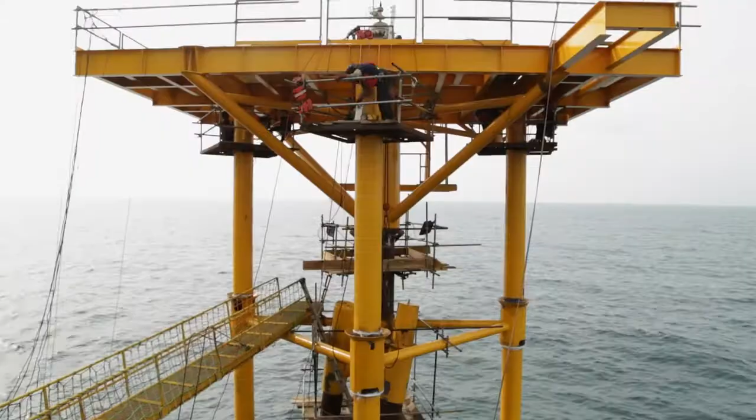Started in 2001, Compact Manifold and Energy Services Limited, CMES, an indigenously owned Nigerian oil and gas service provider, today continues to fulfill its vision at inception, which is to address the many operational challenges facing operators in diverse engineering sectors of the economy, most especially the oil and gas industry.

We started by creating an engineering design company. Then later we migrated to fabrication. After about 4 or 5 years, it also became pertinent that the federal government wanted to institutionalize the local content policy by having Nigerian companies step up to the plate by engaging themselves in more value-added

activity rather than just providing services. With its highly skilled workforce and a mission statement to be the benchmark for engineering design, construction, and consultancy in the country, CMES is today Nigeria's leading customer-oriented oil and gas service provider with a global outlook.

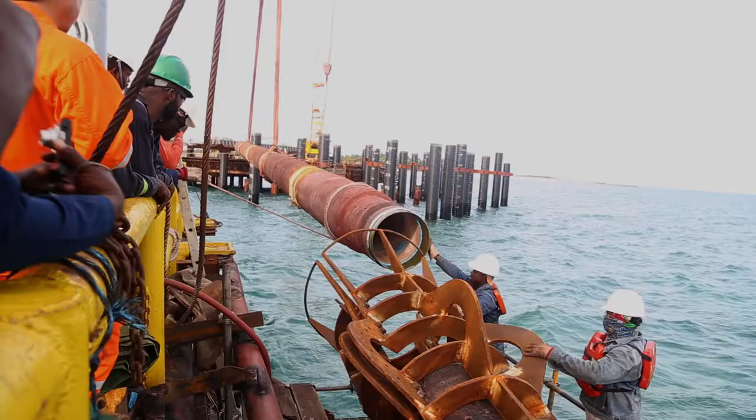As an engineering firm, we maintain engineers in all disciplines: process, civil, structural, both for onshore and offshore, electrical, instrumentation, and mechanical, as well as all of the design disciplines. We also have a very strong project management culture that delivers projects on time, within budget, looking at the client's needs and our commitments to our clients.

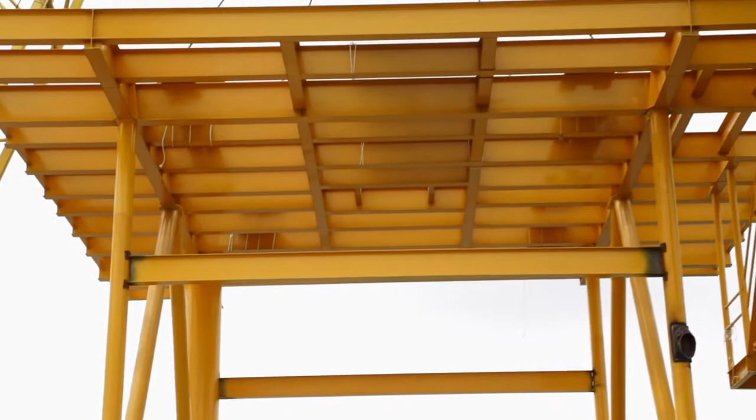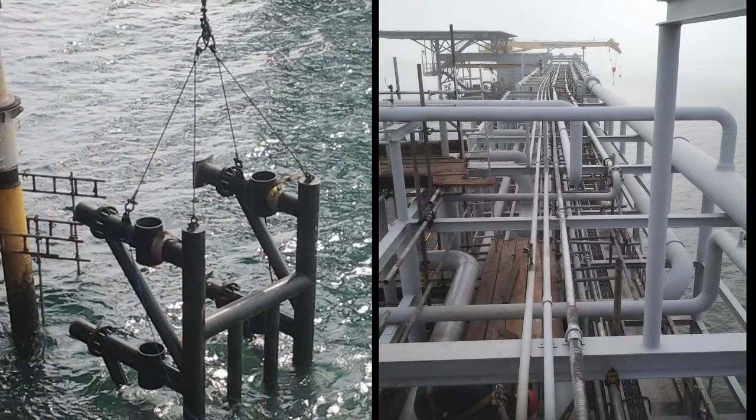Its scope of operation has grown from original mandates in project management, onshore and offshore construction, engineering design and procurement, to include consultancy services and the deployment of its wealth of knowledge in metal fabrication for construction in both oil and gas and building spheres of its operations.

From that little and humble beginning of less than 20 staff, we are well over 180 now, mostly engineers and majorly Nigerians.

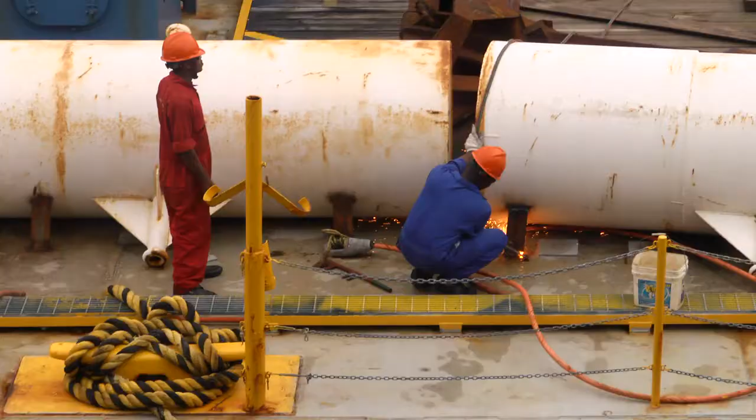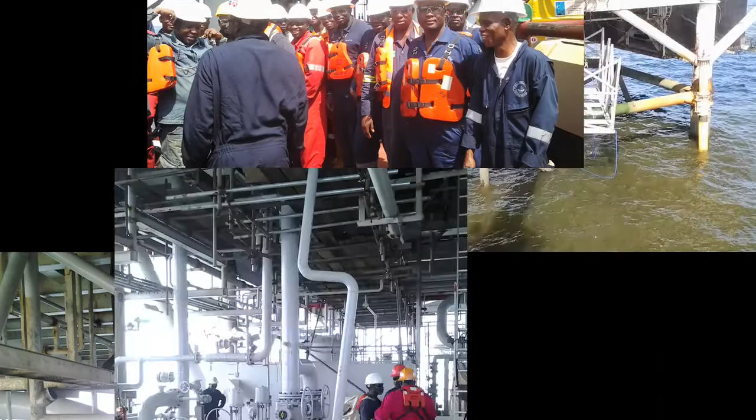Compact Manifold, as an EPCI company - engineering, procurement, construction and installation - has executed major projects with most of the IOCs in country and other marginal field operators.

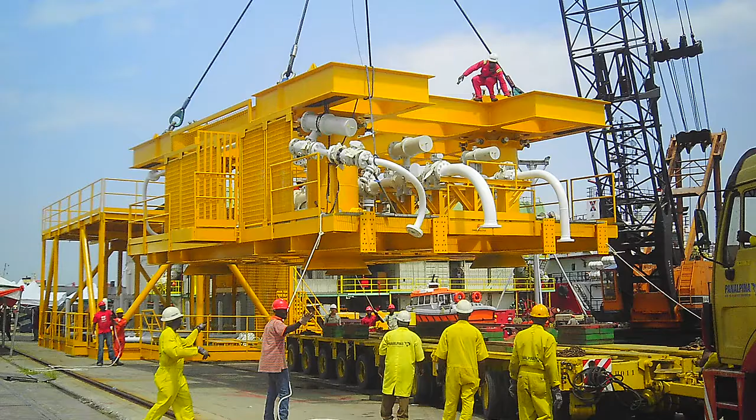Afren was one of the first platforms ever built by a Nigerian company in Nigeria, and this was done in 2007 by CMES. Afren is a 10,000 barrels production platform built and installed by CMES. We carried out fabrication, drawings, procurement, offshore installation and commissioning.

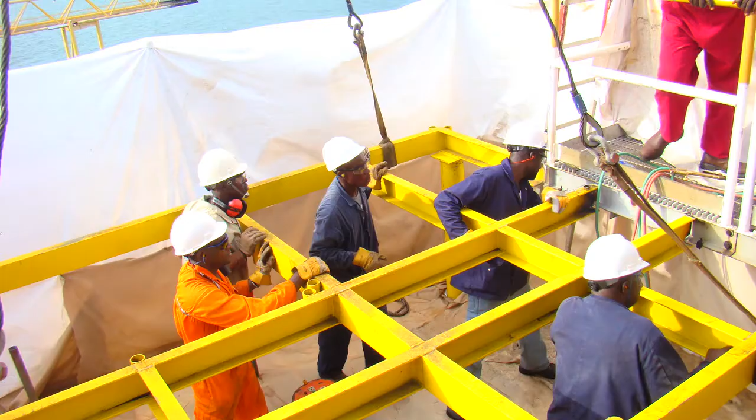The TB1921 project for Adax Petroleum is a subsea pipeline and topside installation project where we worked on over 21 platforms, such as KTMP, TMMP, TPU, ADSI, to mention but a few.

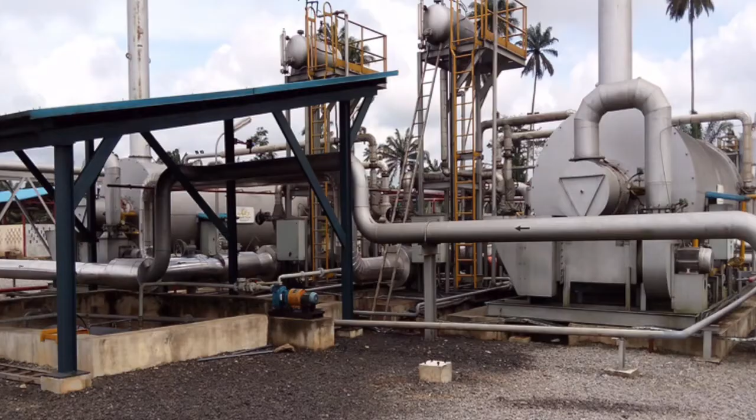The Calabar Law 3 project is a gas transmission pipeline and metering station owned by the Niger Delta Power Holding and NIPP. CMES was issued this contract as a complete EPCI, where all the engineering and procurement work, even to commissioning, was done entirely by Nigerians.

At completion, CMES also operated and maintained that facility for 2.5 years with no issues.

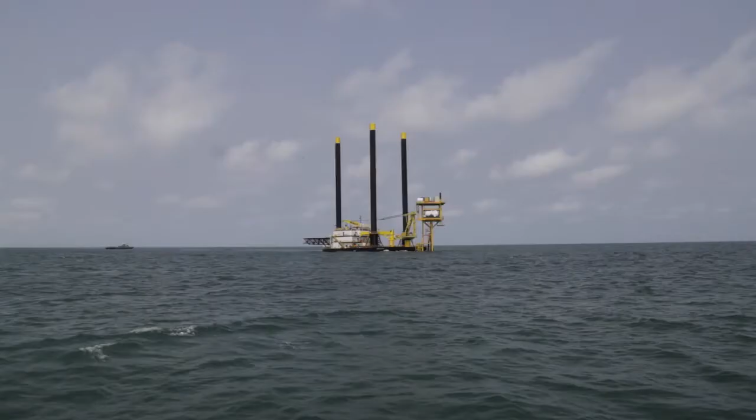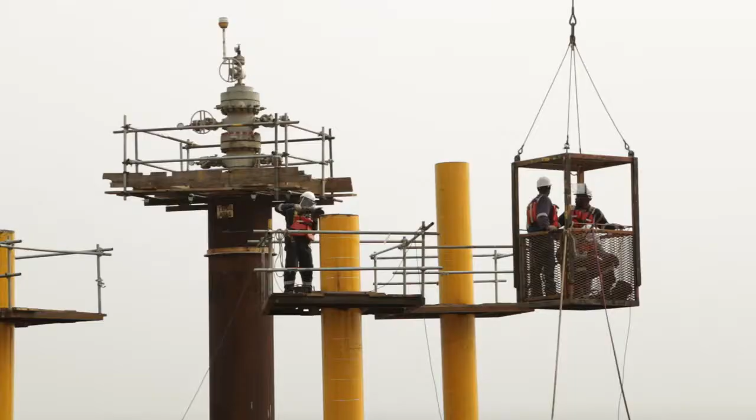We also have ongoing projects right now. One is the Tenoil project, the Atta Field Development project. It's also a complete EPCI project, involving detail engineering, fabrication, installation, and commissioning. It also includes the pipe lay of a 6-inch by 2.1 kilometer pipeline from Atta 6 to Inanga platform.

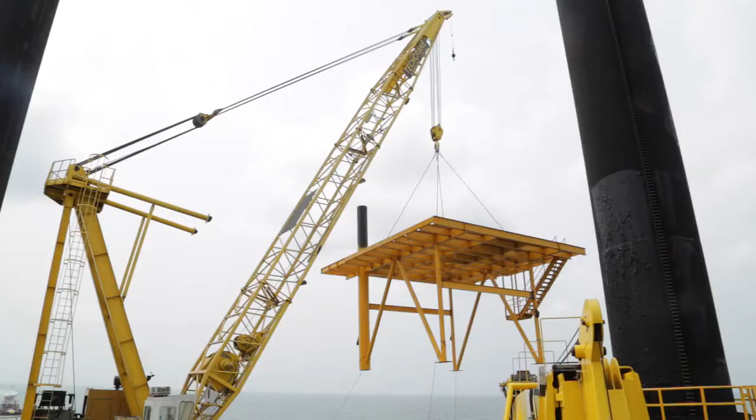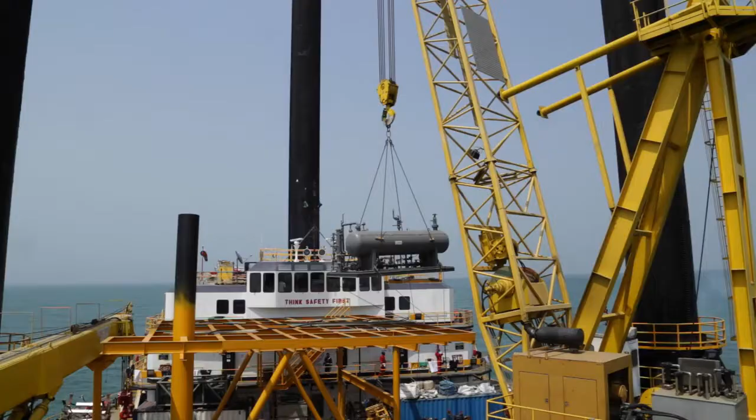This project was also extended because of the amount of work we've done, because the existing Atta 6 platform has been standing for the last 5 years, completely installed with all the process equipment and generators on the platform.

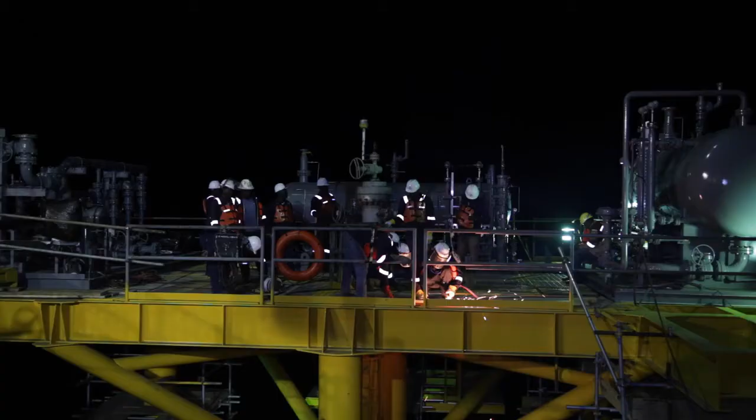The client had to call us back for a possible extension of the contract, which is to carry out the 12-inch by 9 kilometer pipeline from Idaho to Inanga, and also the fabrication and installation of 2 new deck extensions at Idaho and Inanga, where 12-inch receivers and launchers will be installed respectively.

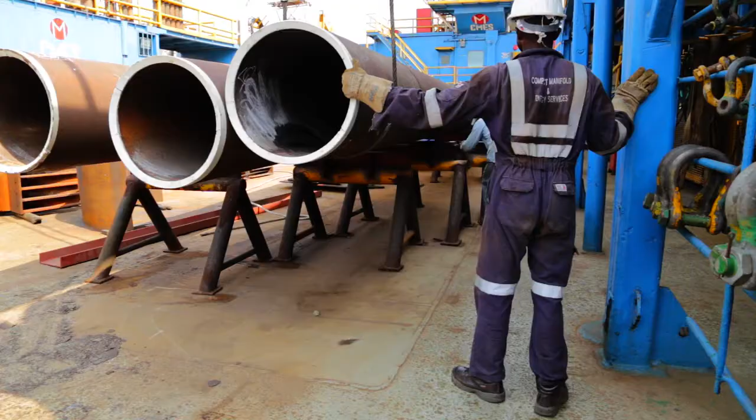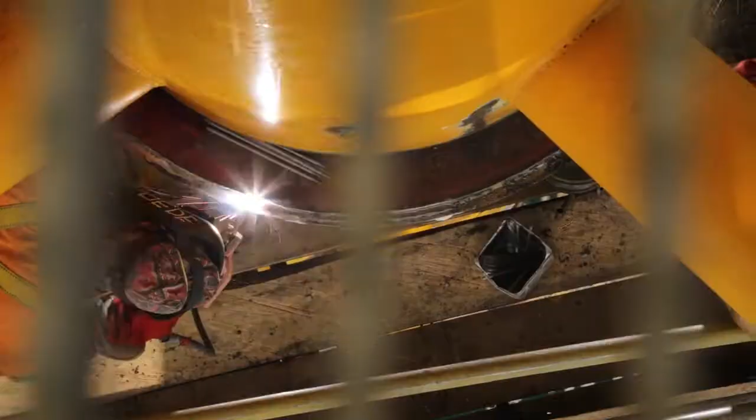At Compact Manifold and Energy Services, we see safety first. We sleep safety, we dream safety in every project that we are involved in.

When we were carrying out the Chevron project, CMES was given an award for carrying out over 5,000 man-hours without lost time injury. This was a great achievement, and we're very proud to own it. This has motivated Compact Manifold and Energy Services to be safety conscious and safety inclined.

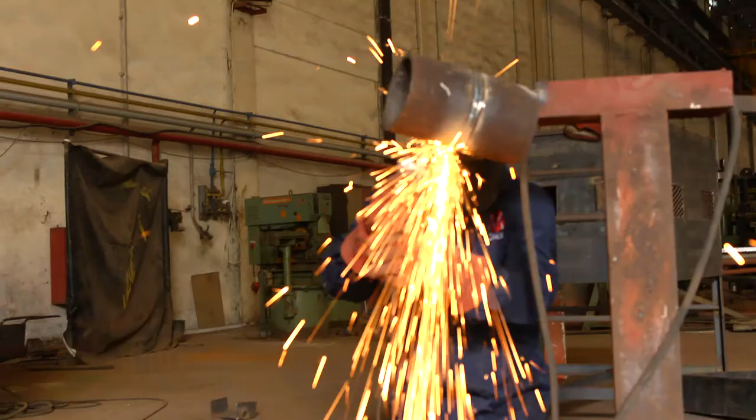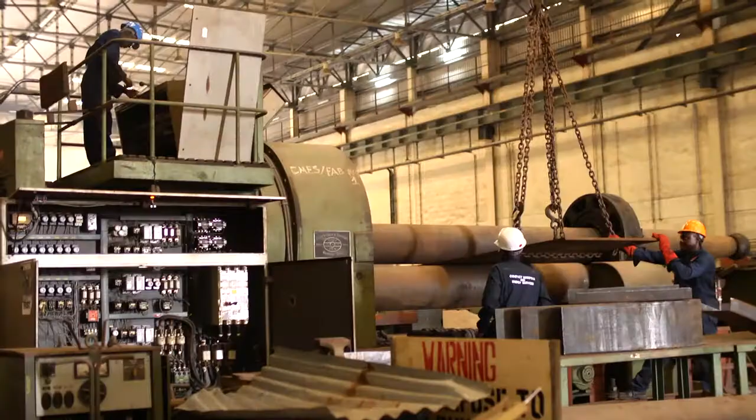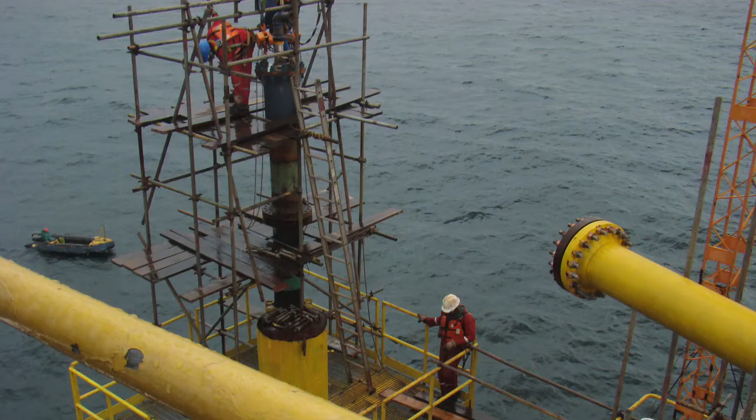Compact Manifold, supported by insights from technical partners KBR Incorporated, continues to produce precision tools from its fabrication yard in Lagos, Nigeria. Its construction services include all fabrication works, pipe laying, installation of automated and manual pumps on facilities, as well as relevant tests for a high-quality final product, stress analysis for upgrading of existing platforms and facility design, with ease in operation and safety.

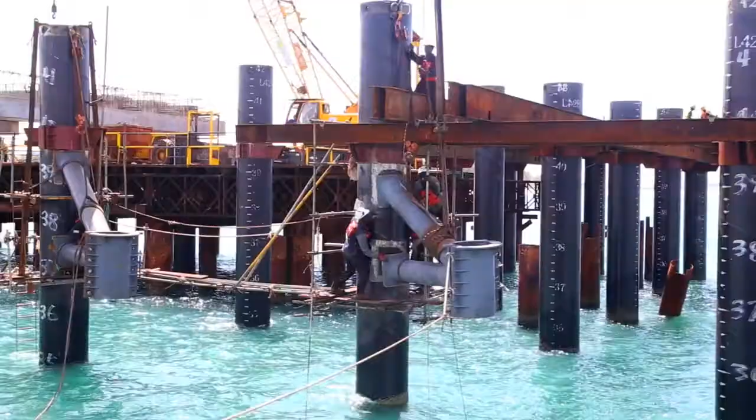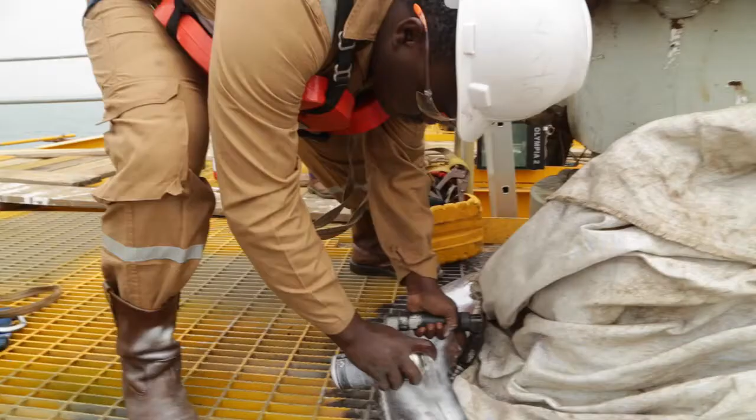Engineering designs are done and construction effected after approval of design. Maintenance and repair works are carried out after proper analysis and evaluation of existing structures.

CMES boasts of a strong track record in redesigning and deck extension works in the upstream and downstream.

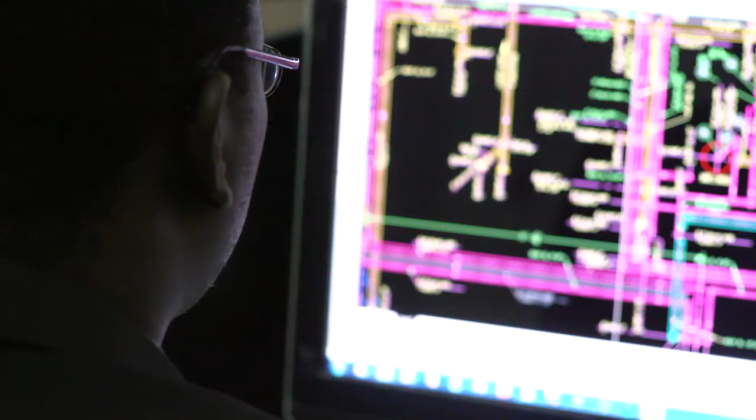With a strong bias for human capital development, employees are continuously trained and retrained in cutting-edge software positions, making the company a one-stop shop for engineering design.

CMES provides preliminary and detailed engineering design services utilizing the latest design software and structural stress analysis.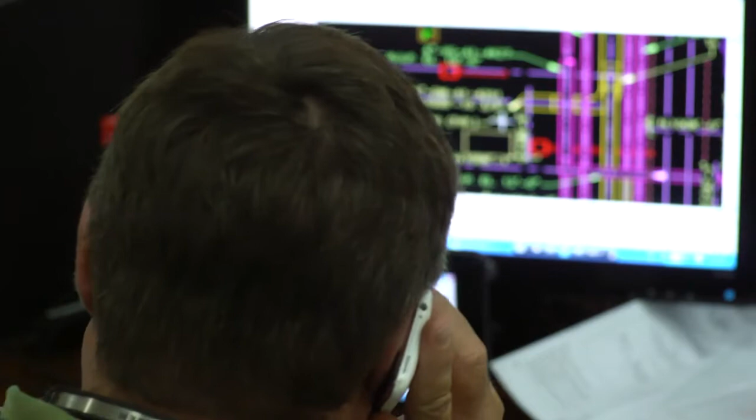The design system takes full advantage of industry-standard design codes, along with design packages like SolidWorks, AutoCAD, PDMS, and SACS, for its engineering and analytical design deliverables.

The project management team is made up of experienced and dedicated workforce responsible for the quality management system of any project.

A lot of times, a lot of companies can deliver a technical solution, that's right, that's 99%. The biggest thing that we deliver on, that we try to concentrate on, is our project management.

If you don't deliver engineering on time, it has a knock-on effect on the startup of the project or the client's ability to deliver to stakeholders on time.

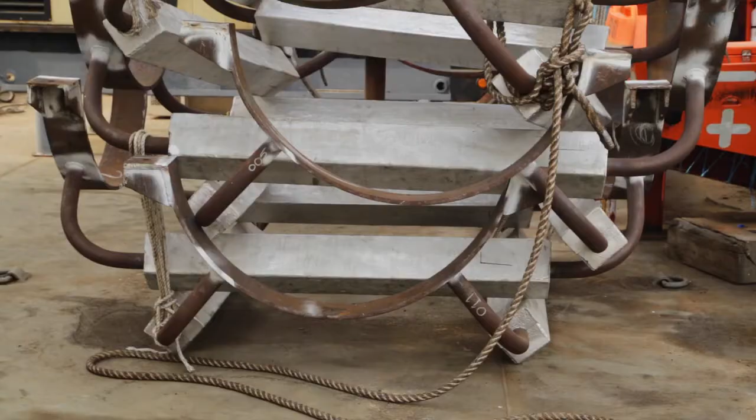So we have a much broader view, or take a much bigger picture view of the client's needs, as opposed to just the small section of engineering that they may have.

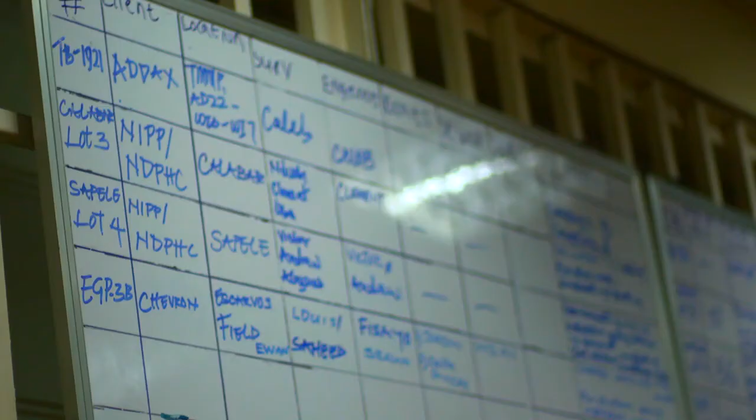The team follows a well laid out process for project control and transmittal system that enables detailed documentation to be sent for review to the client and final approval before issue for construction.

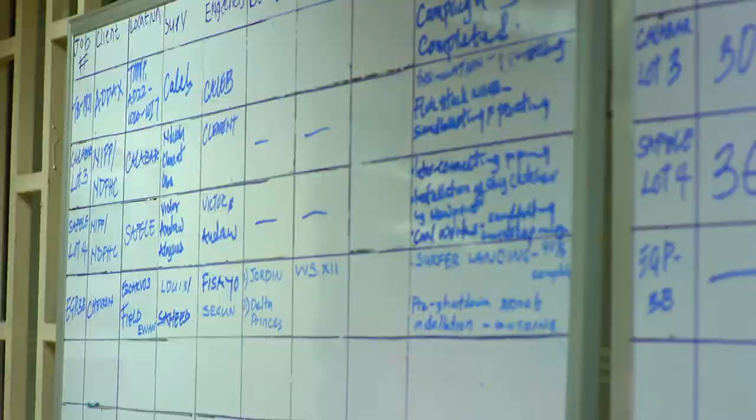This ensures all design and analytical standards are met, with safety, health, and environmental procedures unabridged. The team develops a detailed project schedule and utilizes the project progress reporting system to monitor project delivery dates.

The finance and accounts department is a very integral part of any company, the nerve center of any company, because every activity goes through the department.

We have an enterprise-wide system using the SAP accounting module and other administrative modules.

We have an internal auditing department. We also have a very vibrant procurement department working very closely with the accounting department. So it's a very key aspect of CMES.

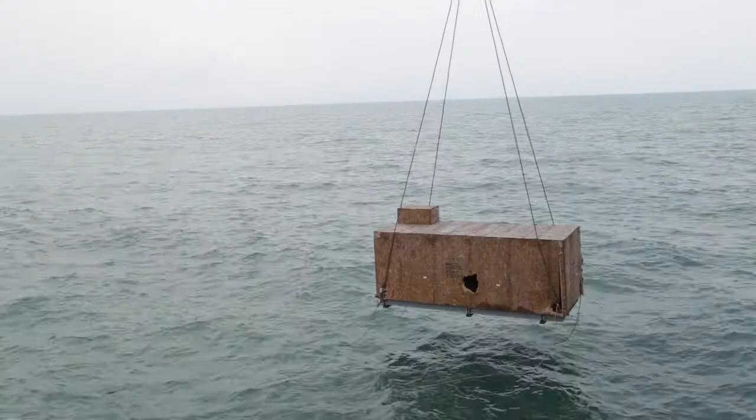The procurement department creates a synergy between all the departments in CMES, from the engineering department or whichever department generates the requisition, to relating with the vendors, ensuring that the service or quality of products they are going to deliver is what is requested.

It also connects to accounts for payments, and even QAQC for the inspection, expediting, and making sure that delivery is on time as and when due, as planned.

Ultimately, to create and ensure satisfaction for our clients.

CMES's competencies in engineering designs include conceptual design, civil structural works, design of pressure vessels, piping plan and code calculations.

These include flow station design, manifolds, valves, flow meters and metering pumps, general arrangement drawings, plot plan drawing, electrical and instrumentation designs, process and piping design, valve sizing, deck extension design, and structural stress analysis.

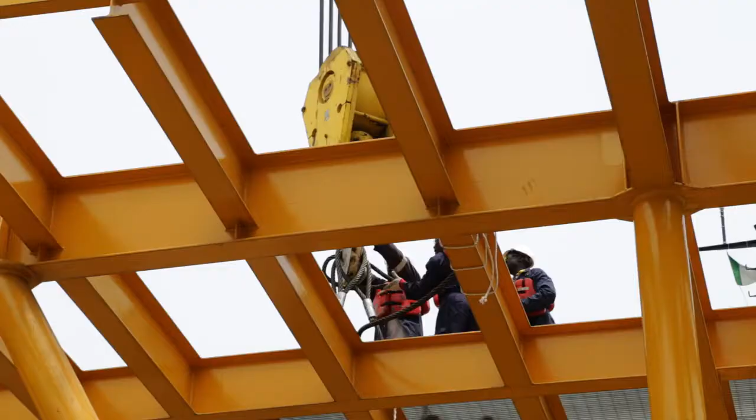Their footprint of excellence can be seen all over the country, evident in the successful execution of projects.

Such projects include the 42-ton Oyot drilling template, the 38-ton Etim NW well drilling template, and the Okoro Setu field.

This was the very first platform for the company, all presently deployed and providing services at oil and gas installations all over the country.

This was fabricated out at the former Naval Dockyard Fabrication Center, and we were able to deliver this project on time and on cost.

And that happens to be the first platform by an indigenous company, to the best of my knowledge.

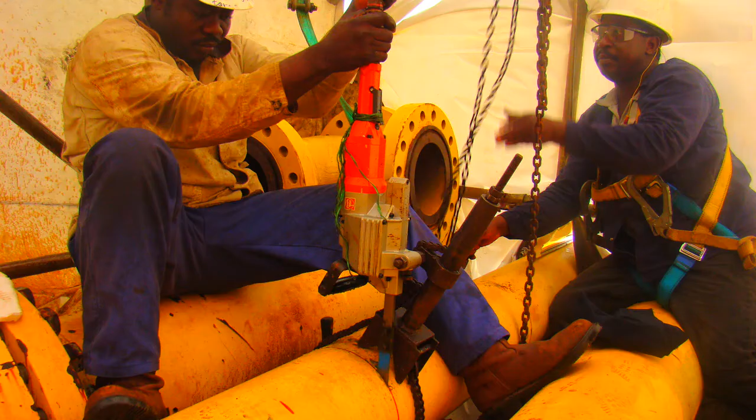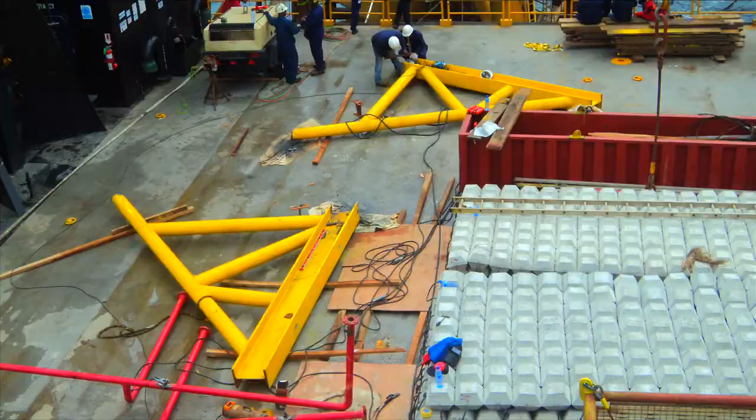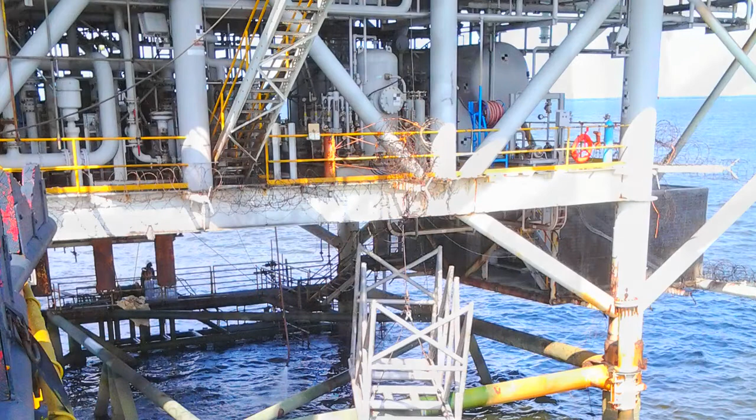We have a project management team. We have a construction manager, and a construction superintendent who manages offshore installation.

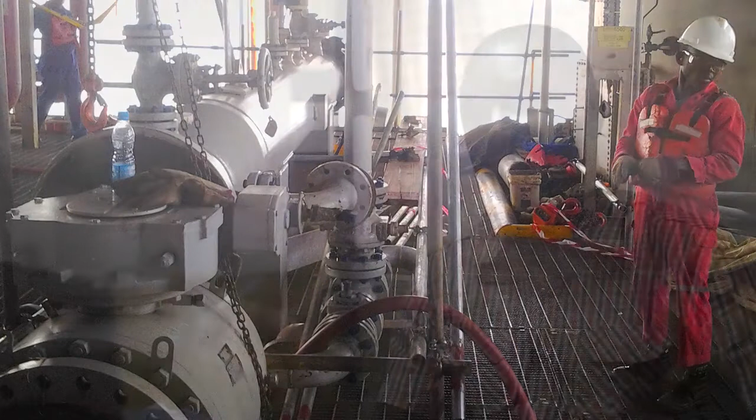The installation plans were done in this office with the pool of engineers, and these installation plans were reviewed with the client.

Based on their acceptance, we mobilized to the field offshore.

We have a logistics, a marine logistics department, who manages our vessel movements, and together they delivered one production platform to everybody's satisfaction.

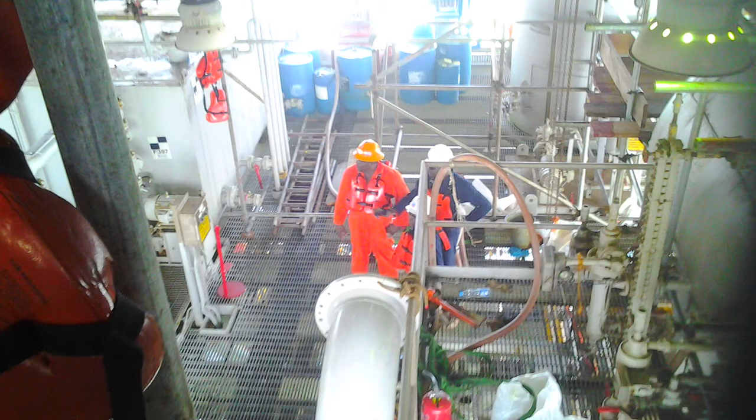In 6 months' work, we didn't have any HSE incident.

No LTIs, no fatality, no MTCs. And the project quality is top-notch. That's what we strive to be at CMES, a top-notch company.

We send a lot of workers to HSE training, BOSIET training, OE training, and IF training.

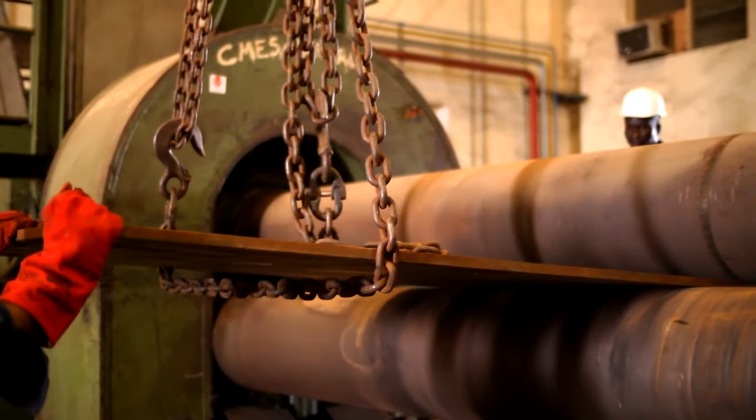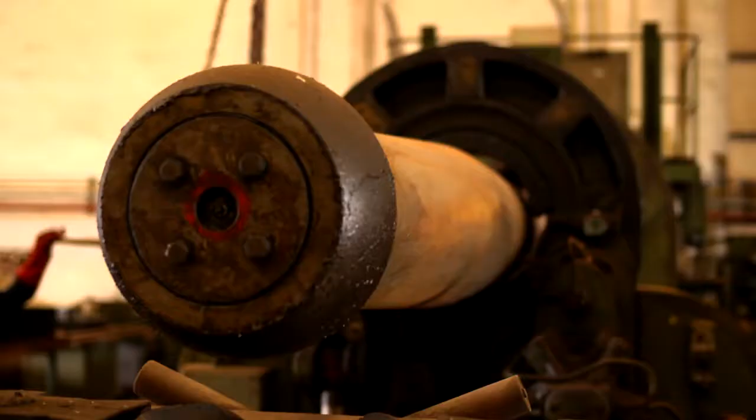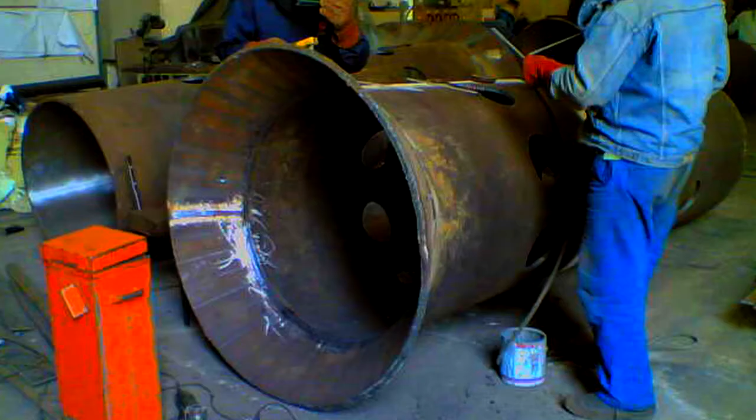CMES Fabrication has a well-equipped fabrication facility located at the Naval Dockyard. They provide expert services in the fabrication of onshore and offshore structures. In order to maintain internationally accepted standards, its fabrication services satisfy ISO and BS standards. Currently, they are engaged in third-party inspections through SGS and Lloyd's of London.

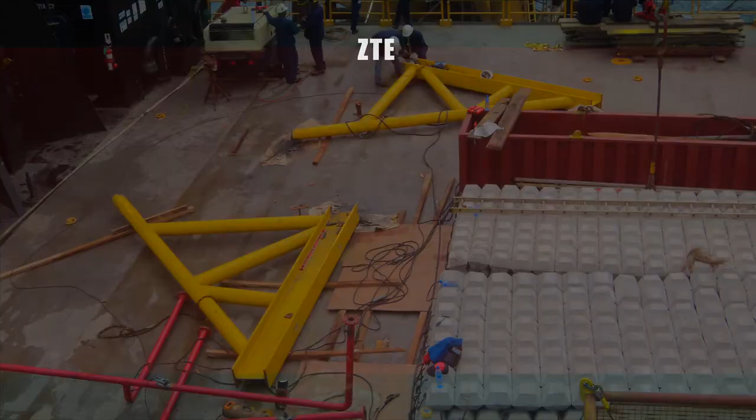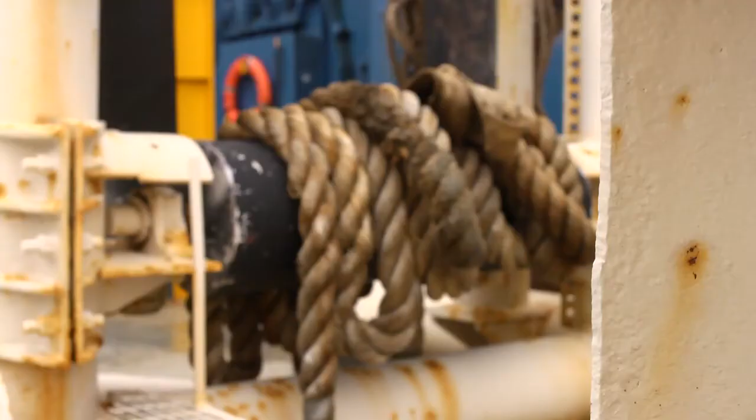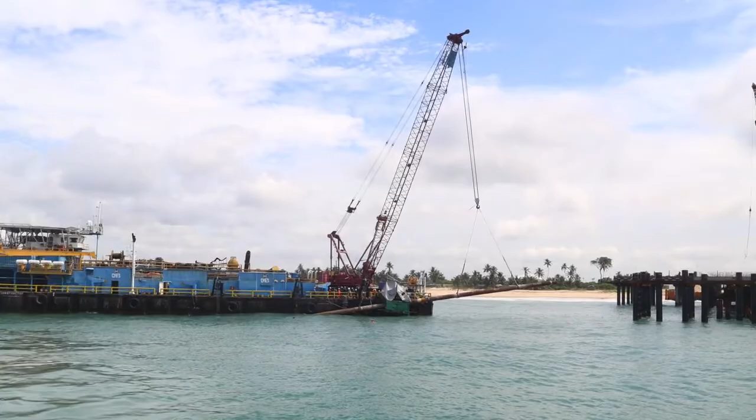To support its offshore construction activities, CMES acquired two barges, the Sea Constructor and the GP35. The Sea Constructor is a 260-foot barge with an 8-point mooring system. It's a barge designed to do pipe laying as well as support offshore construction activities.

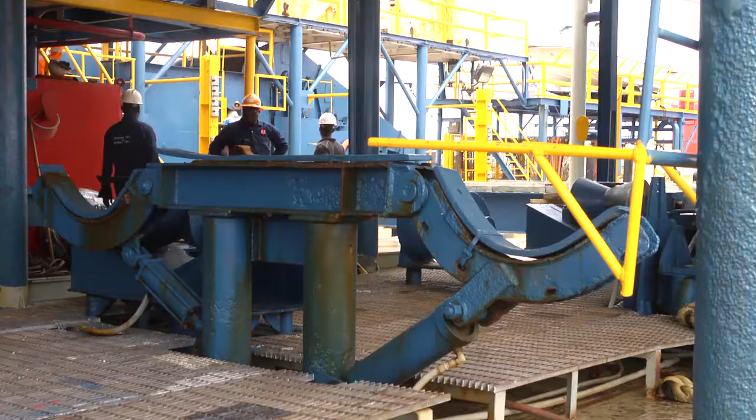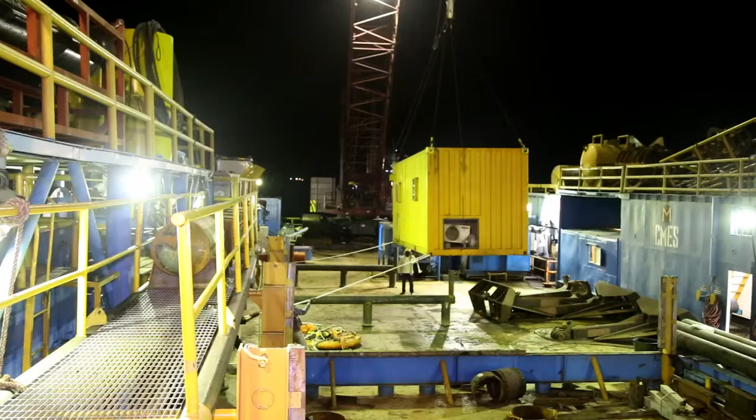It has a tensioner which can take up to 55 kips and can lay pipe from between 2 to 24 inches, and can go up to 36 if modified. It has a crane on board which at 150 feet can pick up 150 tons, and 170 tons at 110 feet. The vessel is able to accommodate 104 personnel and also has pipe laying facilities.

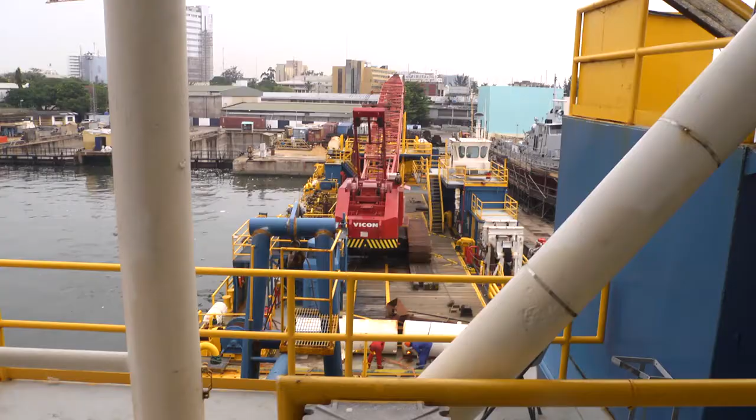GP35, which is right behind me, is a 165-foot barge with a 4-point mooring system. It's able to keep 48 personnel on board and has a crane that can lift up to 70 tons. It also has pipe laying capacities of up to 8 inches and has spud cans that can go up to 50 feet deep that can hold the vessel without the anchors.

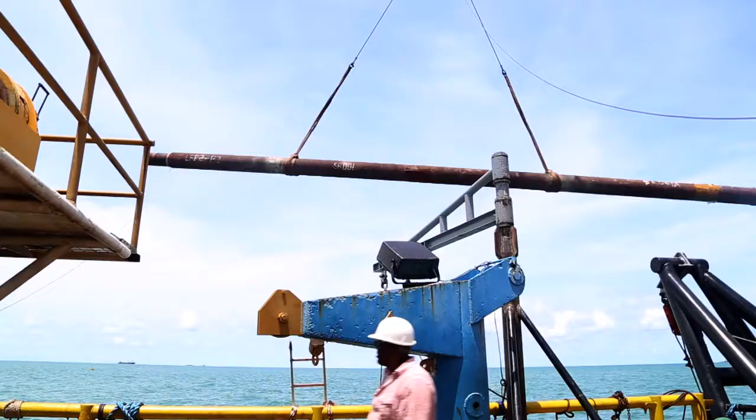Both vessels are very flexible in what you want to use them for. They can both be used for pipe laying, offshore construction, and also as support for accommodation facilities.

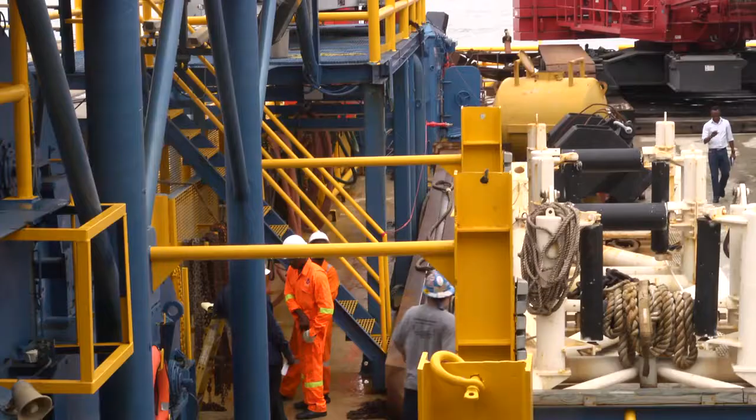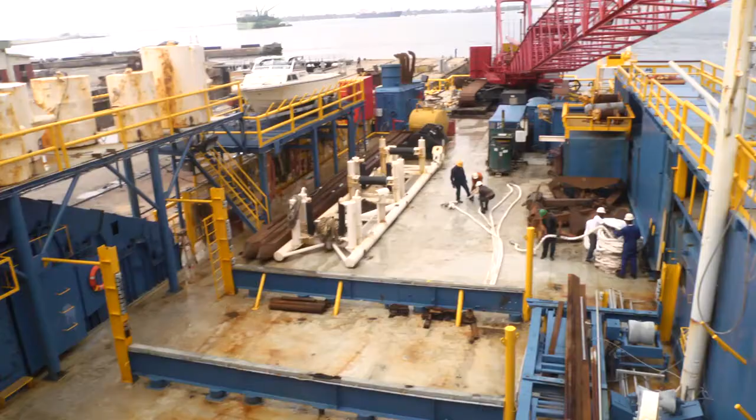My name is Charlie Dowden. I'm superintendent on board the Sea Constructor here. I've been doing this type of work for something like 42 years, maybe 20 of it in Nigeria. I've also worked derrick barges, combination barges, where you can either put in pipelines or install platforms. This barge is designed specifically for pipe lay, or it can be used as a quarters barge for accommodating personnel on hookup jobs on platforms, or just about anything that you have need for it to do. It should be able to do it.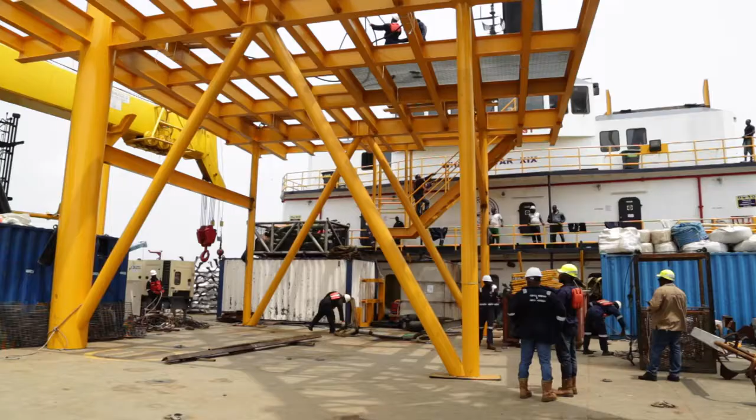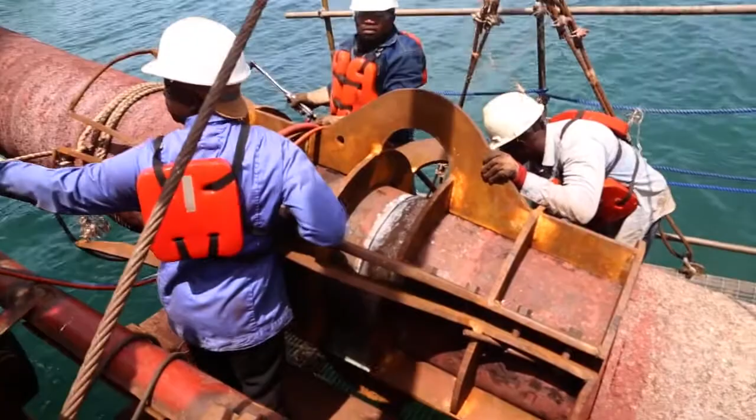CMES have acquired Sea Constructor, and now CMES will go into laying of pipeline, installation of decks, installation of jackets. The Sea Constructor can install jackets of 150 tons. It can make a deck lift of 150 tons.

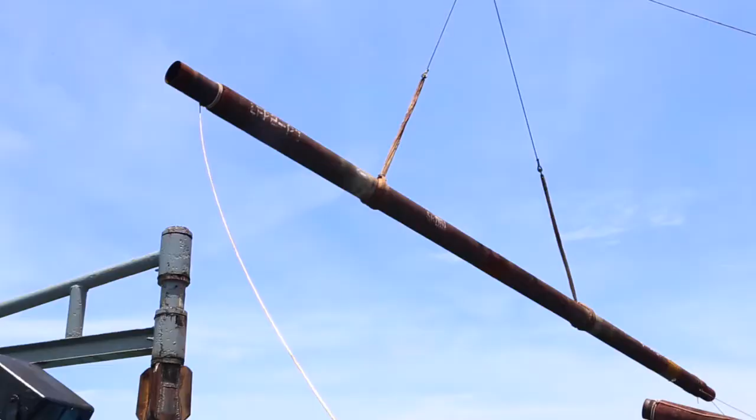The main reason why CMES has acquired the Sea Constructor is due to the fact that it worked in Nigeria a couple of years back. It was able to do topside work, heavy lifts, and pipe laying.

The GP35, on the other hand, which is the smaller of the vessels, is able to go into places where big barges can't go, these are creeks and shallow waters. For such things, you can use the spud cans, which can go up to 50 feet, and you can use the vessel for plug and abandonment of wells, dive support, and also minor construction.

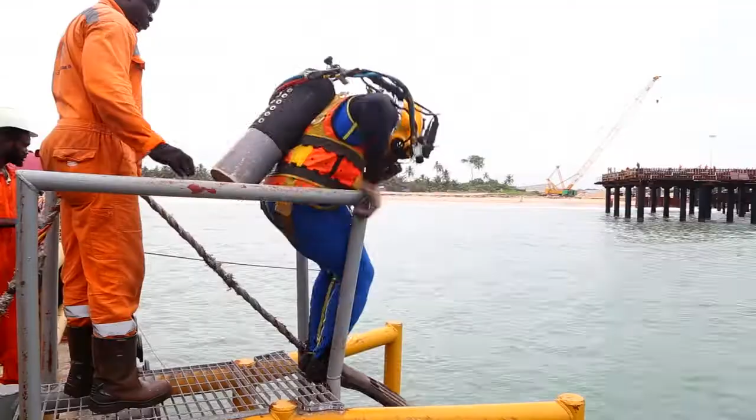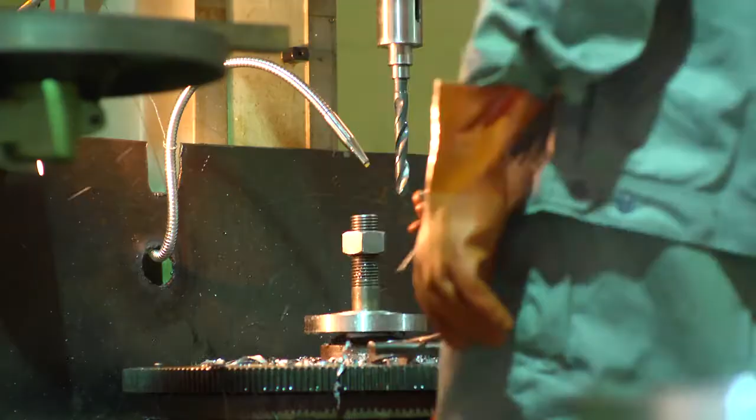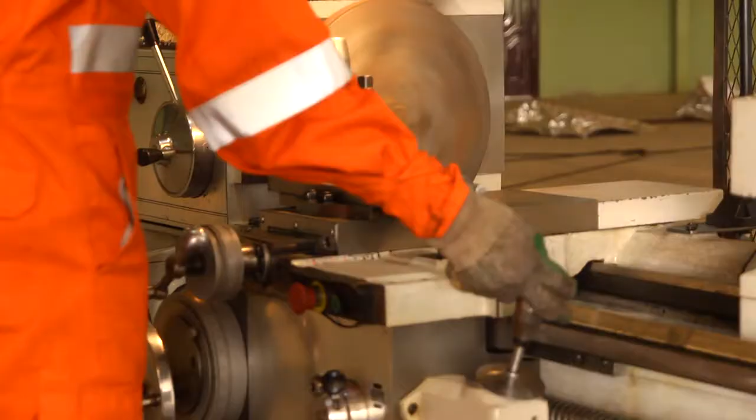CMES's outstanding work in flanges and fittings production would see the company grow its annual output of flanges to 3,840 tons, giving a steady annual production growth figure dating back to 2001, when its annual output was 2,400 tons of carbon steel flanges.

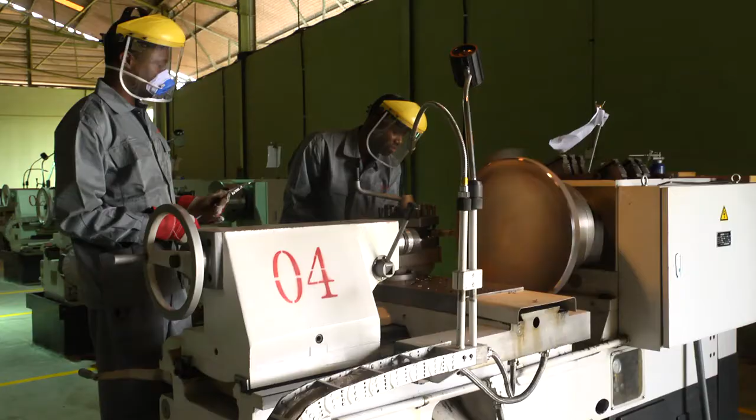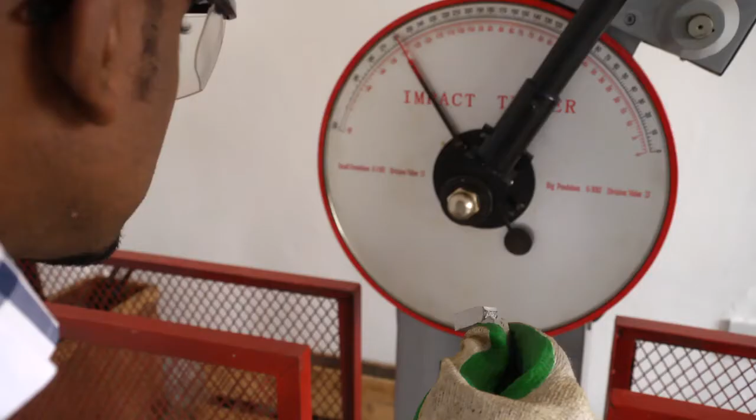At its Benin City factory, stringent material quality assessments meet the most severe international standards, starting from material acquisition through testing to forging and finally shipping out inspections.

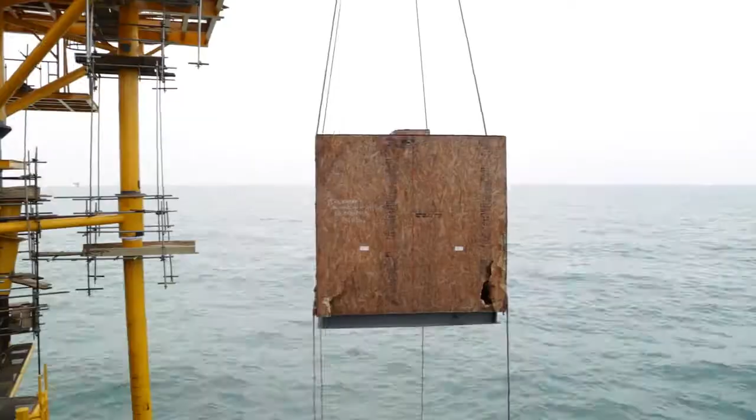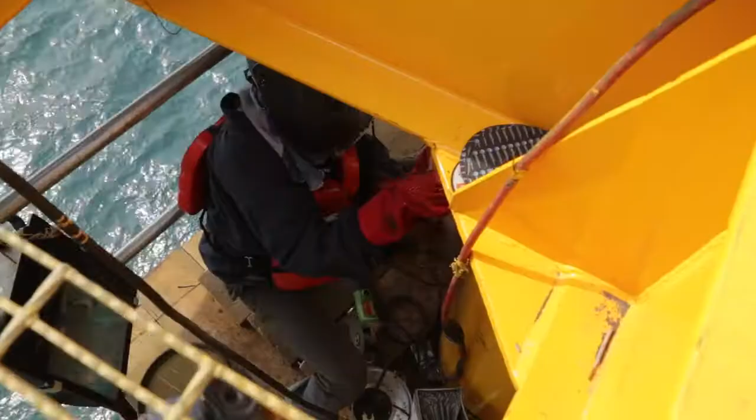A recipient of many awards, which include the award in 2010 for largest turnover for purchases from American companies by the American Embassy in Nigeria, CMES remains true to its mission statement to be the benchmark for engineering design, construction, and consultancy in quality and customer satisfaction.

When we won the award, the commercial department for the US consulate, that's for the largest volume of imports from US companies. We did a lot of purchasing that period. There were a whole lot of heavy duty equipment that we imported from the US.

We're very passionate about what we do and how we do it. We're passionate about meeting our commitments. We're passionate about delivering on what we tell our clients we're going to deliver on. And we're passionate about doing it with a lot of quality.